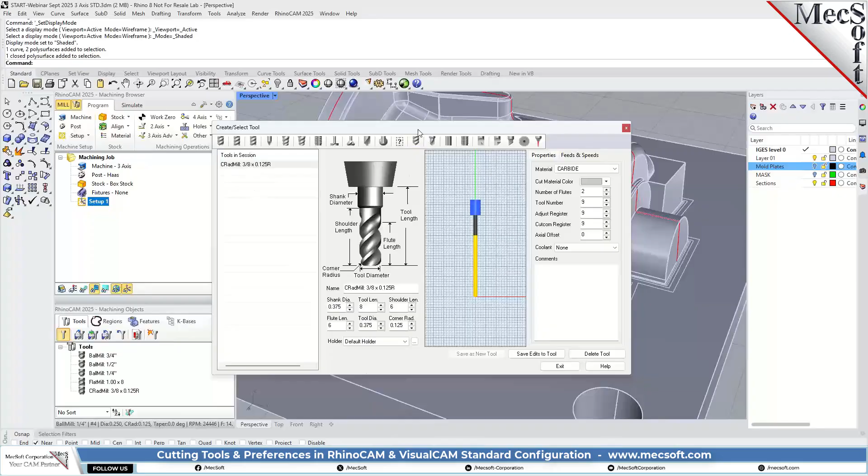We have a flat end mill that we're going to use for roughing. And we also have a corner radius mill, sometimes called a bull mill, which has a flat at the bottom, okay, and a corner radius of 0.125, which is the same radius as the 1/4 inch ball mill that we're going to be using.

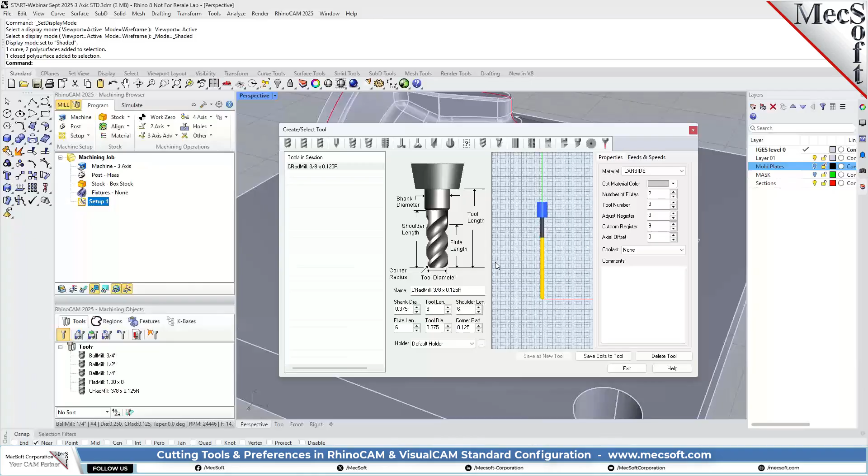And if you've heard how we recommend to do different types of operations in horizontal roughing, we always recommend that you use a flat end mill if possible, because it's going to calculate a lot faster, so you'll get through the actual programming faster, and it's actually going to cut faster. And we recommend that you don't use a ball mill or a corner radius mill for roughing, but there's always exceptions. In this particular case, in order to get what we want right here along this edge, we are going to use a corner radius mill.

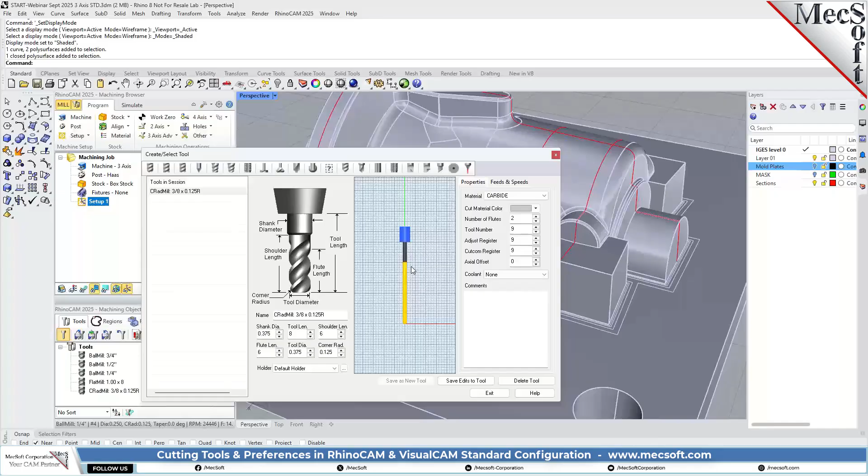And if you've also been to our webinars, we try to show you different ways of using different operations, which may not be readily apparent to you. So what we're going to actually do is use a horizontal roughing operation with a corner radius mill in order to get a perfect fillet along these bitangent areas here. And that's something we're going to show you in detail. Okay, so those are the cutting tools.

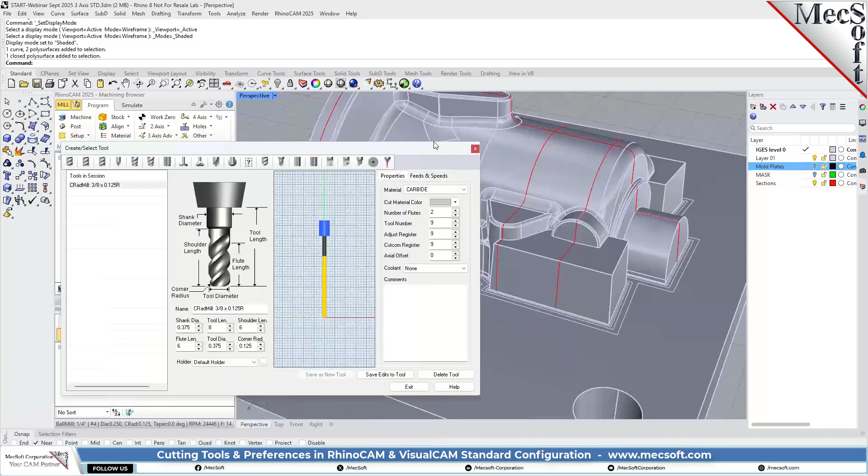And let's take a look at some of the preferences that we have set. Stock, we've just set some colors for our stock material. And we have edges highlighted, which you can see. Cutting tools, we just have colors for those. Standard feeds and speeds. We're not going to be actually recommending any feeds and speeds. If you've seen our webinars before, we're not ever going to tell you what feed rate to use for a particular tool, because that is something that you have to know specific for your machine, your cutting tools, your materials. So all of these feeds and speeds are going to be the default values.

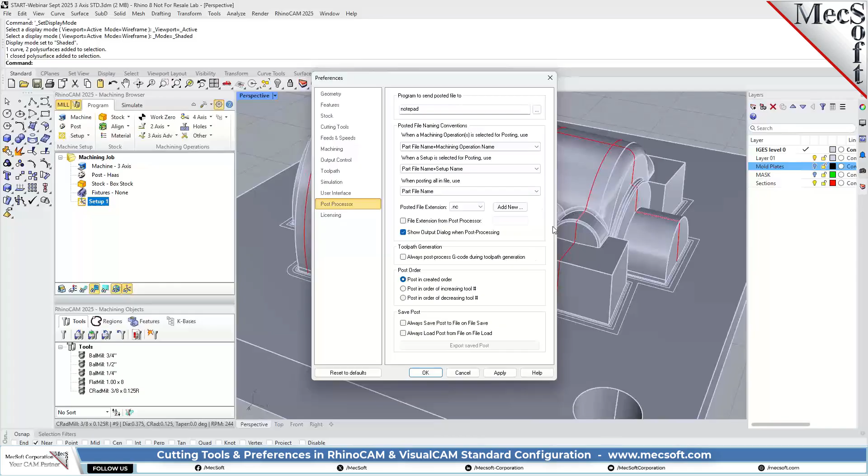Okay, and then we have a stock model display transparency. We have that set in the middle between opaque and transparent. User interface, all these are pretty much the standards here. Post-processing, that's pretty straightforward. Okay, so let's go ahead and get started. Now I actually have another screen over here that I have this part fully programmed on, so I'm going to be referring to that as we program this part.

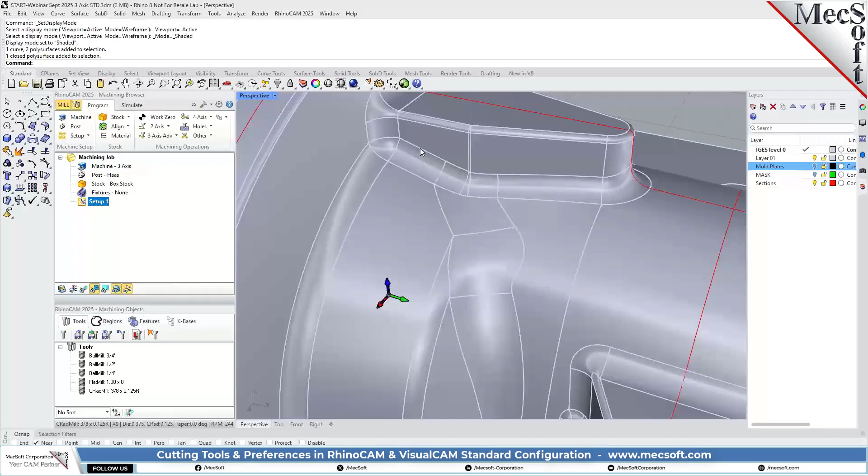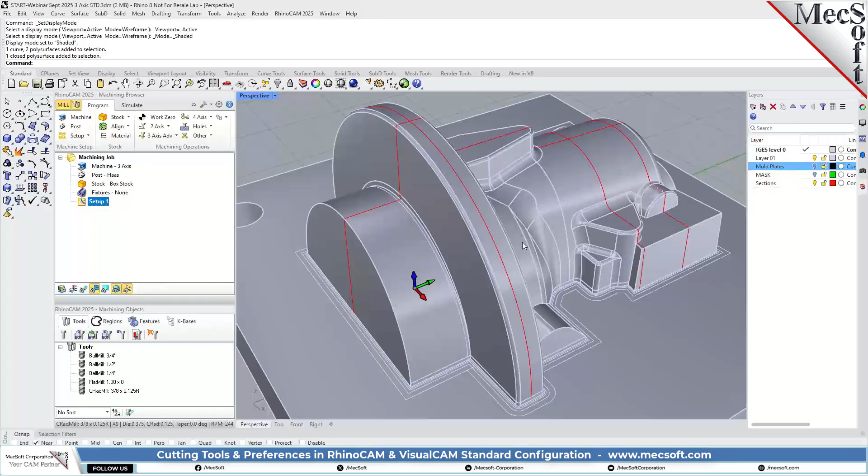So for any CAM operation, as I mentioned, when you start, get to know your geometry. We went over the geometry here for this part. In your geometry, get to know what these radiuses are, because your finishing ball mill will need to be that or smaller radius. Okay, so we got a number of radii here, and we got a number of section curves that we've cut. We looked at the drafted angles here based on the sections, so you can cut those using Rhino's sectioning commands. So we got the section curves, and we're going to start over here from the program tab.